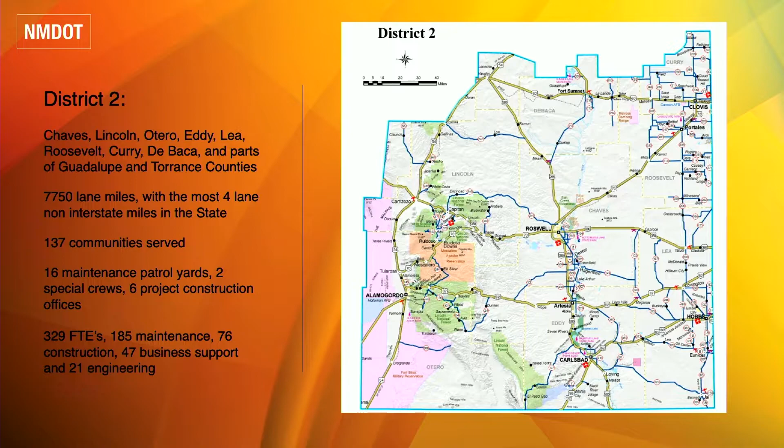This is a slide I take around the state when I talk to our legislative partners and our executive manager. We know who we are down here. The oil and gas industry and the extractions, tied traditionally to ranching, drive the economy here in Southeast New Mexico, and not only here but in the state.

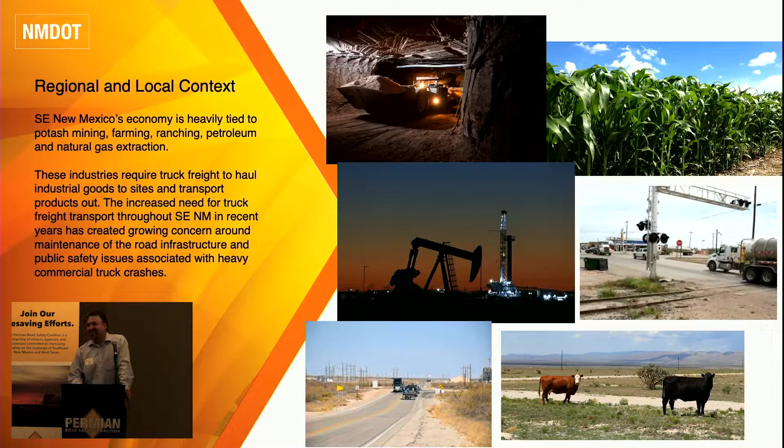One of the comments I get a lot now that I public speak and present projects here in Southeast New Mexico, especially projects coming to the community where they may have questions about the choices we're making on our highway designs, is: you from Santa Fe don't know anything about Southeast New Mexico. But that's not the case.

Like Michael introduced, I'm born and raised here. I understand this area. I have family that works in the industry. We've been here a long time as a family. I understand what's going on, and it helps me come into rooms like this and understand where you're coming from, and take what you're dealing with out there back to our teams at the district office to make some significant changes to help all of us. We all work here, we all want to go home at night, and we want our families to go home at night too. So I'm proud to be from this area.

When I took this position, the cabinet secretary had a lot of internal goals for me to improve at the district office. But the bigger picture goal, or metric, that our secretary wanted me to take on was pavement condition in District 2. That was number one. As NMDOT has progressed these last few years, we've really moved toward data-driven decisions on how we select projects and where we spend the money.

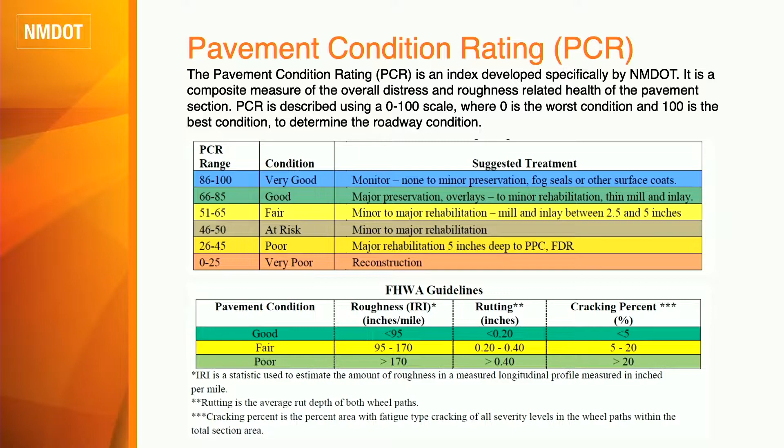This is a pavement condition rating. We survey all roads every year to see the conditions they're in, kind of a rating scale: 100 would be a brand new road, and it goes from 0 to 100. It's based on cracking, rutting, and smoothness out there. So we really have a handle on where our roads are at, and we're using this to dictate where a lot of our money's going. This is kind of where we're at in District 2.

I'll just use the U.S. routes because we have a 25-minute presentation here. In 2019, roads on District 2 were 40% good, 50% fair, and 10% poor. That's where we're at in 2019.

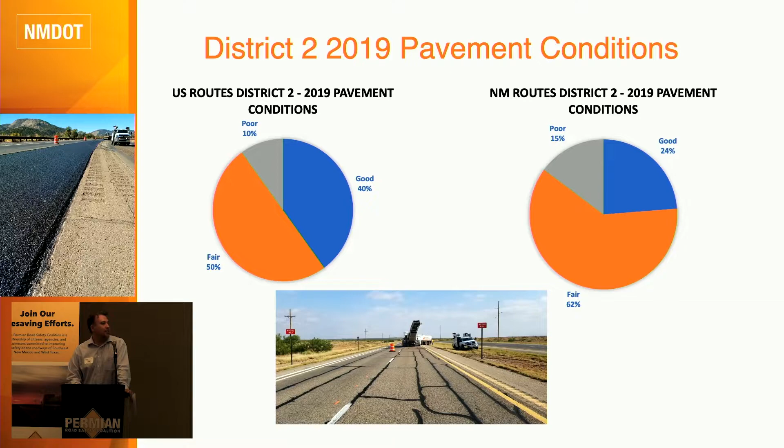As you can see, we're going down. It's not a secret, and probably many of you have driven that road shown at the bottom there. That's New Mexico 176, in really bad condition of pavement. We are having an active construction project there.

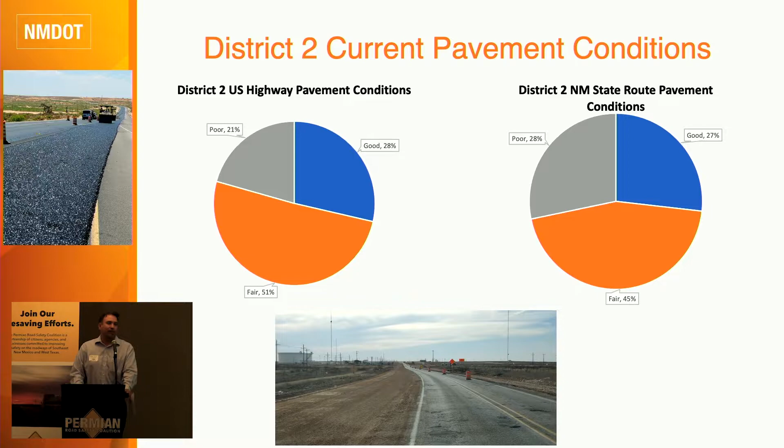Overall, as the district engineer, I'm tasked with raising those percentages. As a state, we really are looking to get our good up to 40% and our poor under 5%. But that's a big task because that's going to take money.

This is a stat that New Mexico should not be proud of. This is something we're dealing with. We don't see as much in Southeast New Mexico, but as you can see, 103 pedestrians have been killed on our state highway system. This is just our state highway system, not the local roads. New Mexico is number one in the country for pedestrian deaths per capita, so it's something not to be proud of. A lot of these are happening in the bigger cities, Albuquerque, Santa Fe, but we are together as a state, so we need to figure this one out because this is a significant jump in the last 5 years.

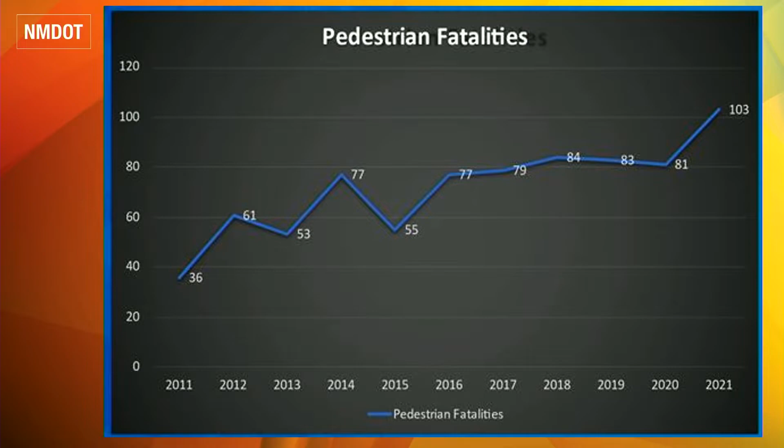So going back to improving our pavement, like I said, we've transitioned to a data-driven agency. This slide kind of needs to be updated, but as you can see, pavement doesn't deteriorate in a linear curve. It looks like this, and the longer we wait to improve a road, the more it's going to cost us. So what we're trying to do is invest our money on that first half of the curve. That gives us a better value for our money. It just makes it smarter, what we're trying to do.

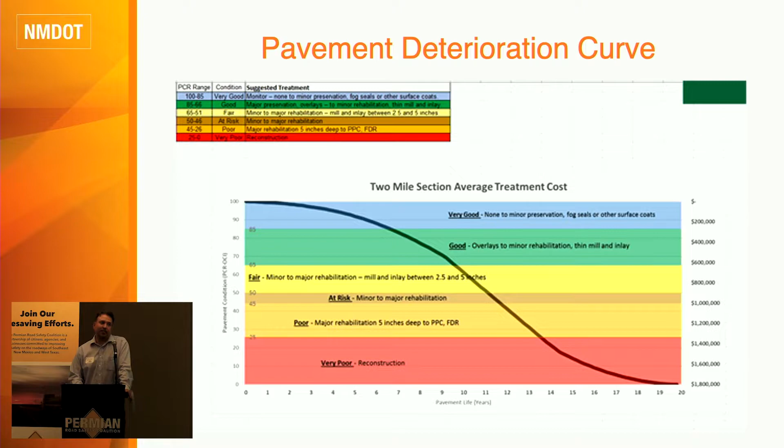As you can see at the bottom, that figure's way outdated for 2 miles - you're almost looking at double that now. So if we're waiting till these roads are falling apart like 176, we're putting a lot of money into it.

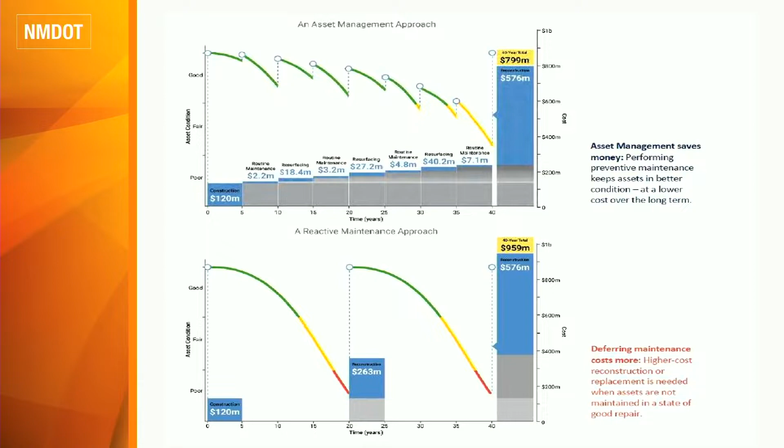So just an example, this is from the Rhode Island DOT. They've taken this asset management approach, spending money early on roads that are good and fair. This allows us to enhance the overall system and in the long term save a lot of money. So if we're putting money on roads that are good and fair instead of ones that are really poor, over the long life of a highway corridor - as this study done by Rhode Island DOT showed, over a 40-year lifespan of this highway, they saved over 160 million. That 160 million could go to a route that needs safety improvements instead. So it's very important that New Mexico DOT is adopting this strategy.

So just examples, some of the pavement projects we've taken on in this area over the last 5 years - this is the southeast portion, 176, 18, 128. We have invested over 65 million. We've adopted this strategy throughout the district, and I'll give an example, not in this area, but US 54 between El Paso and Alamogordo.

We're investing in this road, which is in really good, decent shape. We're putting money into it, and I'm getting calls asking why we're putting money in this road when the X road over here is falling apart. But we're trying to explain the strategy a little better.

That road is in good, fair condition. I'm investing 15 million now to preserve it, but in the long run, DOT is going to save 40 to 50 million dollars on that road. So in the future, we can take that 40 million and bring it back to this corner of the state, or up to the Clovis area, or wherever it's needed. So that's our strategy on pavement.

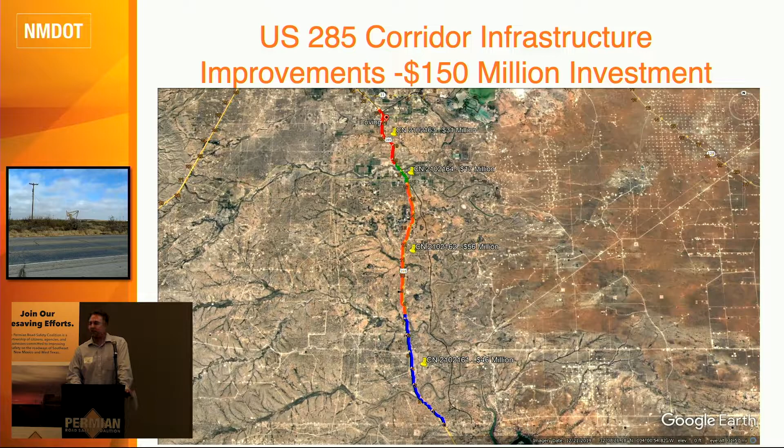So the best way I see to reduce fatalities and improve safety is to take on these major infrastructure projects. This is the one we're doing right now — the whole 285 corridor is under construction. We invested $150 million. Next slide.

As you see, these improvements — the first part will be a Super 2, like John talked about. We're also improving all the major turnouts; we've identified that as a problem. And the portion from Loving to Malaga is going to be 4-lane. By increasing capacity on these roads, bringing in what they really need to address the traffic out there, we feel this is going to reduce those accidents to a minimum.

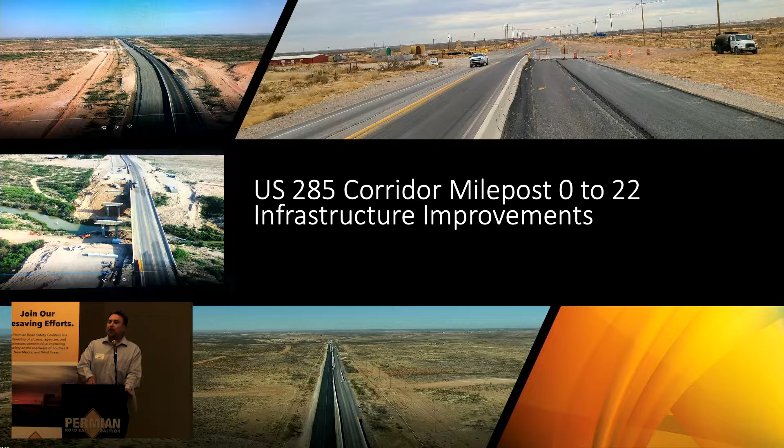At one time, US 82 was the most dangerous road in District 2. Next was US 285. So we've been prioritizing, and now our next road is 128.

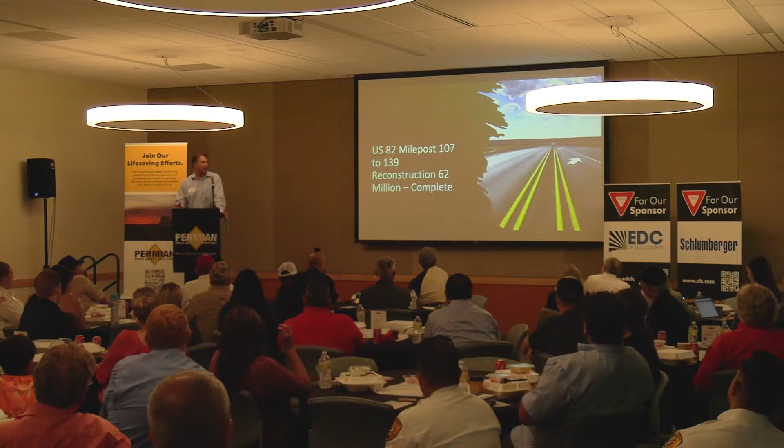I like this picture because it reminds me of 20 years ago, when DOT took on the corridor between Roswell and Ruidoso. At one time that was a 2-lane road, and it was the most dangerous highway in the state of New Mexico. We took it on in 2002 and expanded it to 4-lane. Since 2002, there have only been 2 fatalities on US 70 between Roswell and Ruidoso. That shows you what major infrastructure improvement can do, how much it can reduce what's going on these highways. The 2 fatalities that happened on US 70 were alcohol related, so they weren't really tied to the conditions out there. That's why I'm really pushing these larger infrastructure projects.

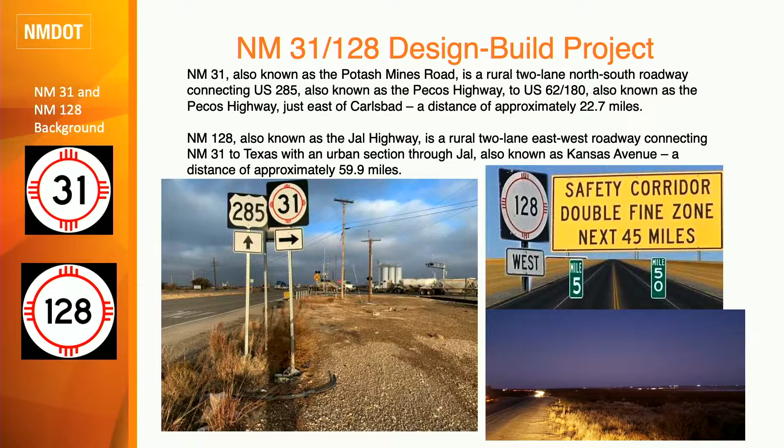So, of course, the reason we're doing 128 is safety, the congestion, the conditions out there, and the maintenance that it needs. Next slide.

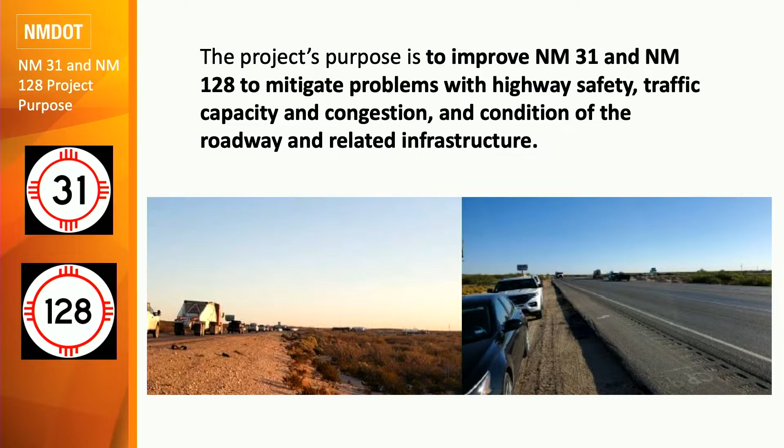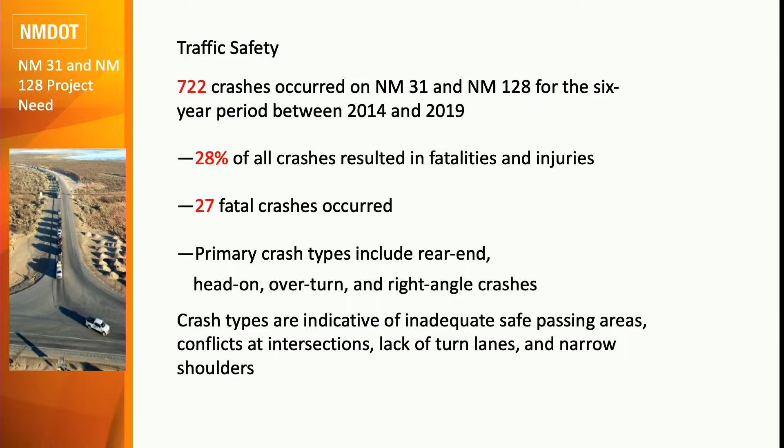So for us to reconstruct and do everything for New Mexico 31 and 128, we're looking at $433 million. And for New Mexico, that's a lot of money.

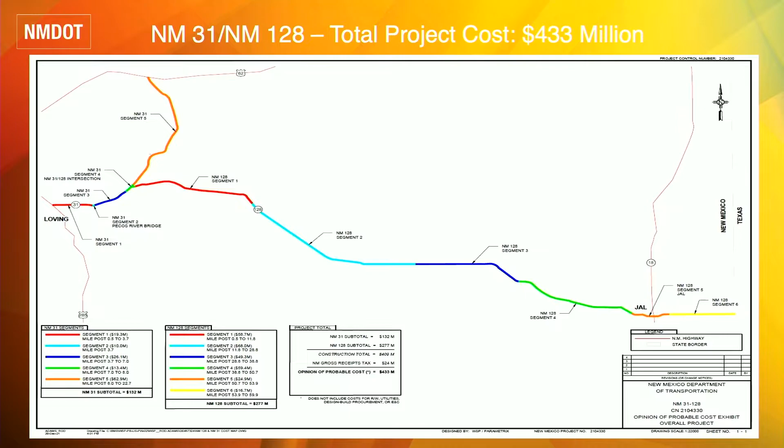What we're doing in District 2, just like we have to do with a lot of our projects, we have to prioritize. So the design build projects we're working on right now, the packet we're putting together to get to our contractors and designers to build is this packet right here. Overall, this is about $180 million.

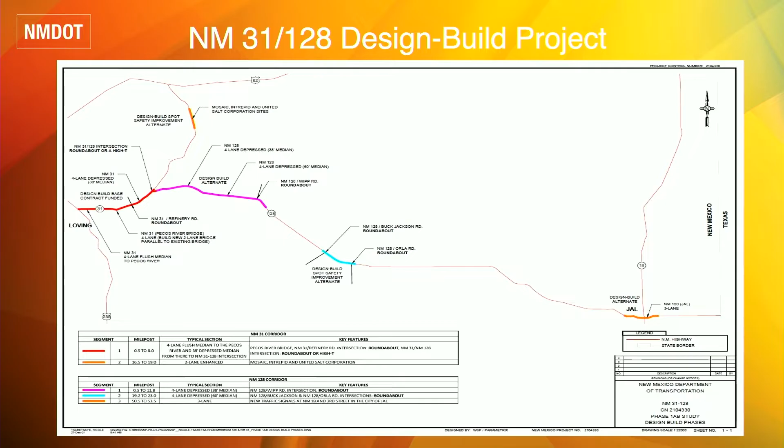Right now, that first part is funded in red, that'll be priority. And within our contract, each of those other colors are alternates that if funding becomes available, we can take on. That's how we're going out to try to address this corridor, prioritize it, and then hopefully when we get these sections built, we can go on to the next sections and try to get to that rest of the $433 million.

The Jal section, of course, is critical. Priority one would be that red section, and then Jal would be the next one if we got funding this next coming year. We have put in for a grant, so hopefully we'll get that for Jal. We can get that part done if we do not get other funding from our state partners.

It's kind of our schedule. We're anticipating going out—the final step before we go to construction was to execute that design build agreement. We're looking at March 2023. The schedule's kind of getting pushed, so that's probably not till summer '23, and then you'll probably more likely see construction late '23, early '24.

There's a lot of talk about the bipartisan infrastructure law bill that was recently passed. I get a lot of people coming up to me saying, wow, you're getting all these billions, you should be taking on 128 next week. Yes, it's nice to get additional funding, we need it. But as you can see, over the next 5 years New Mexico is going to receive $3.7 billion. The last 5 years we received $2.5 billion from these federal bills.

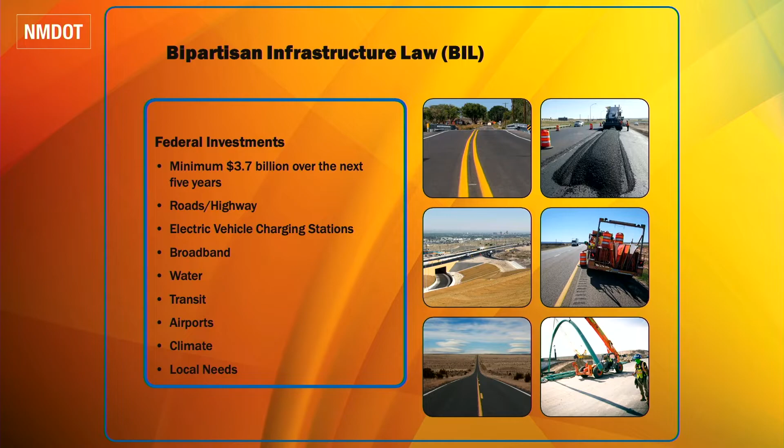So it is an increase, but a lot of that money is dedicated to a lot of those categories up there. We are investing in broadband and some of these other ones, not necessarily in the infrastructure projects that DOT is doing.

As you can see, $400 million for 128, even the prioritized version is $180 million. With $50 million, it takes a long time to build this. I don't know what John's budget was, but if he woke up with this budget, he would probably spit out his coffee. But that's just the nature of New Mexico—we have smaller budgets, and we really need to prioritize.

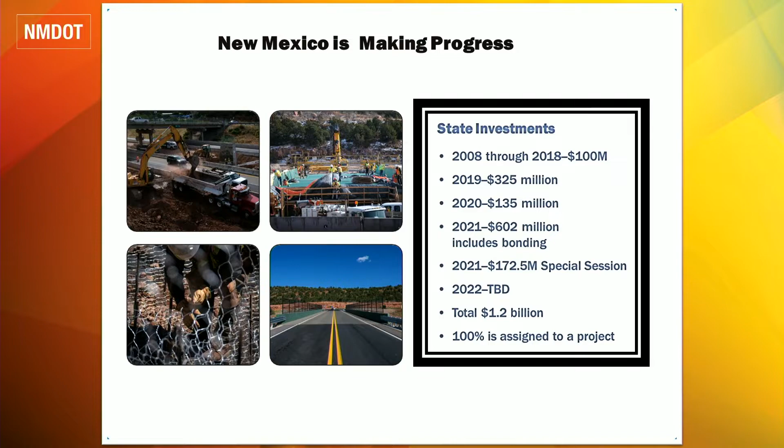So the only way New Mexico is going to be able to take on these large infrastructure projects like 128, or the previous one, 150, it has to come through our state partners, through our legislature. As you can see, they have seen the value in infrastructure and they're starting to invest. From 2008 to 2018, we only received $100 million in those 10 years from the legislature for infrastructure projects. But as you see, every year they've seen the value and have been giving us more money.

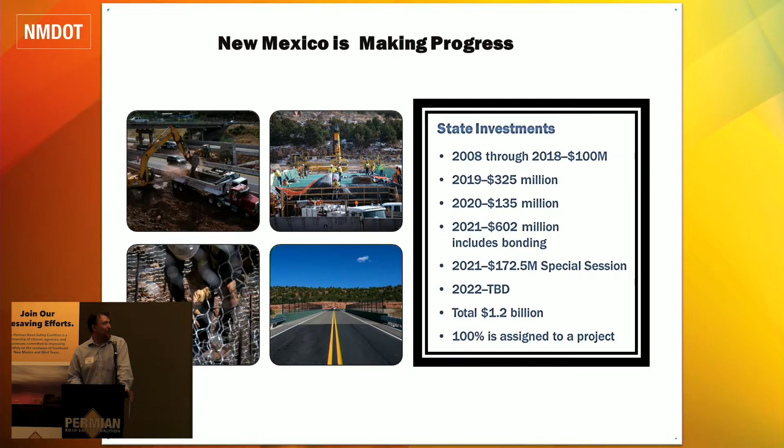Some of that will go to 128. I'm not supposed to really lobby, but as John said, write a few letters. Because really, it's not going to happen unless the state continues to put investment money from the state funds that are coming in.

As you can see, we are bringing money to New Mexico for these projects, and you're going to see a lot of active projects in this area. As you can see from this statistic, when it's construction season, 1/5 of the roads, at least the major roads, are going to be under construction.

Every 100 miles you're going to see barrels and cones. So be aware. This is a stat that saddens me every time I read it: 3 people lose their lives every day in our highway construction zones, 40,000 people injured. It's a problem, just like all of us are dealing with different issues within our work. We're dealing the same with ours.

Our work zones have become very dangerous. I hadn't been on a work zone in years, I've been in the office, and I went out on a construction site with some of the guys, and it's scary. Standing there next to that barrel with cars flying 60, 70 miles an hour, they're not slowing down. I really feel every day for the guys that are out there working and making our highways better.

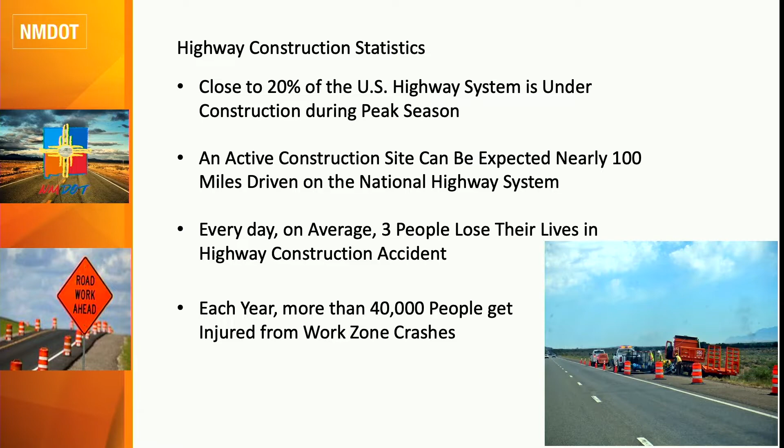So just kind of a glance at what's going on in our work zones. It's rising every year. As you can see, 857 people were killed in work zones. The majority of those are passengers, people wrecking in these work zones. A high percentage involves commercial vehicles. This kind of gives you a glance at what our industry is dealing with.

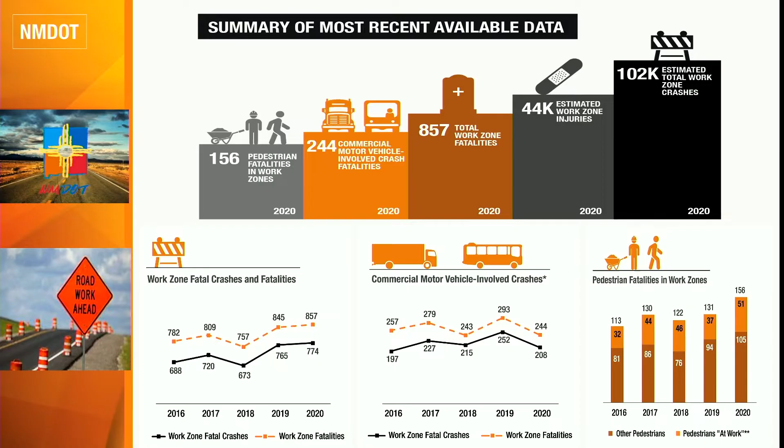Just recently on New Mexico 176, two gentlemen lost their lives when they hit the tail end of people waiting. That's the biggest problem for us right now, especially in this area. Peak traffic hours vary, and sometimes these queues are extremely long, sometimes short, sometimes they outpace our signs. So we're having to really think about how we're going to set up these work zones, because we're getting more and more vehicles crashing into the back of vehicles waiting to go through the work zone.

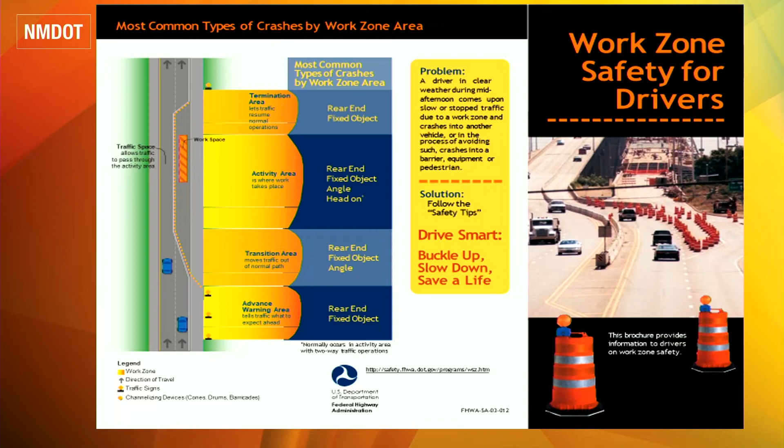Just some tips: pay attention to the signs, slow down. The majority of these accidents are happening on our higher speed highways, the ones that are 65, 55, 75. People are distracted, so just be aware. There's a lot of construction going on in this area, so just some helpful tips.

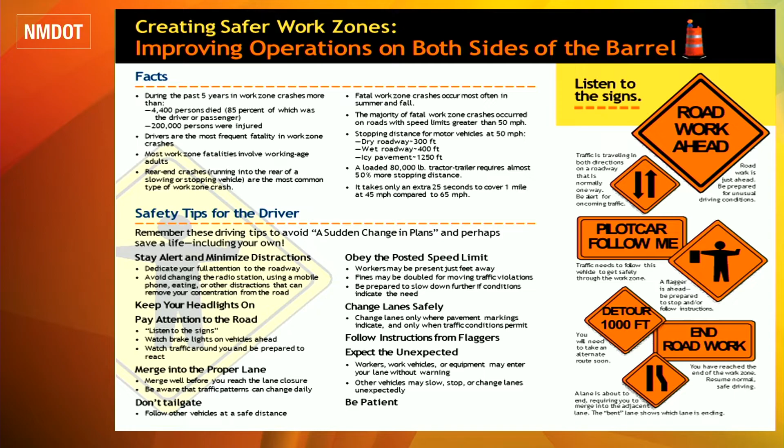Other DOTs are getting very creative, relying on technology to help out with what's going on in these work zones, using detection systems, putting them out further, really anticipating how far those lines are going. Our typical work zone used to be a mile with signage; we found out that's not even nearly enough in this area. We've gone to 2 miles. Sometimes that's not enough, and some of those crashes have occurred 3-4 miles from the work zone where they're backing up so far. So New Mexico DOT really needs to start looking at some of these advanced systems, but we're not there yet. We're far from taking on these intelligent kind of traffic systems.

So what we're doing at our level is really reaching out to you as the industry stakeholders, especially on our Design-Build 128, we're really having a lot of stakeholders getting input from you. One of the biggest parts of our contract is going to be maintenance of traffic, and that's going to require constant communication with the industry, so we don't have these rear-end crashes coming into our work zones.

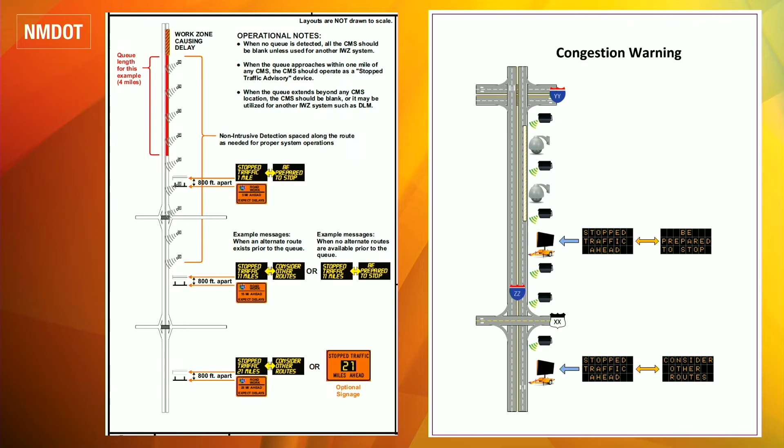So December 6, 2021, me being a new district engineer, you have so much to think about. 332 employees work under me, and on this date, I get a call at 10 a.m. A commercial vehicle went into our work zone. The four employees, DOT employees, are being rushed to the hospital, and so your heart sinks.

You got that gut feeling, hoping they're okay. Unfortunately, one of our employees was airlifted to Lubbock and didn't make it that day. And so as a district engineer, you sit there and you feel you're responsible for these people. I feel like I'm responsible day in, day out, to give them the equipment they need, give them the training they need to try to avoid this situation.

So hopefully we keep having these workshops, keep working together, and ultimately getting this goal of reducing what's going out there. I appreciate your time. Any questions?